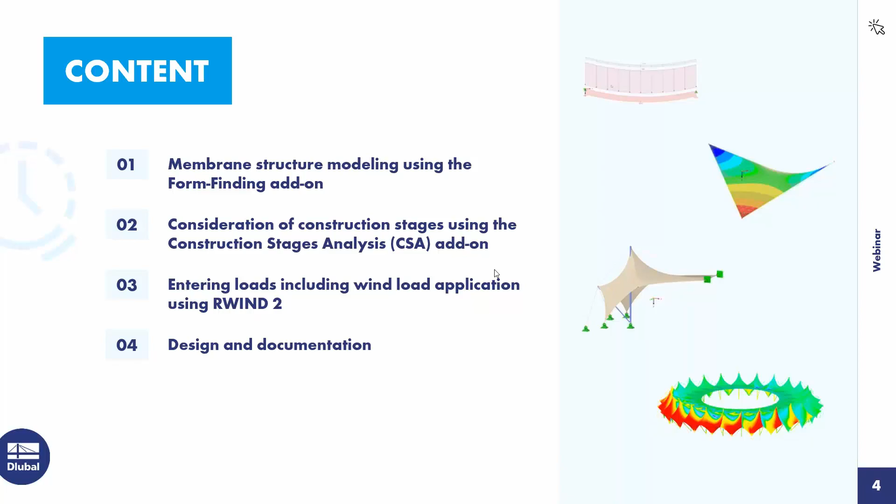Okay, thank you, Andreas. Then I take over and start with the technical part of our webinar. Today I want to show you how we can deal with membrane structures in our new generation, RFEM 6. For this we planned 4 main points we want to show you.

First, of course, how you can model form-found shapes and work with them in the program. Then how we can organize these shapes to each other with stages. Third, how we can create wind loads according to CFD analysis on the structure. And finally, how you can design and document such types of structures.

Of course, I can't do this completely for one project in one hour, but I want to give you an idea of how this is working. You see on the right side some pictures from top to bottom.

Since the new generation has a new input concept for these tools, I want to explain this with a simple example on a cable at first. Then we go to, let's say, a hypar sail surface structure, and afterwards we use all these functions I explained on a more complex structure, a stadium segment, and finally we take care of wind simulation on the complete stadium model, which you see on the bottom.

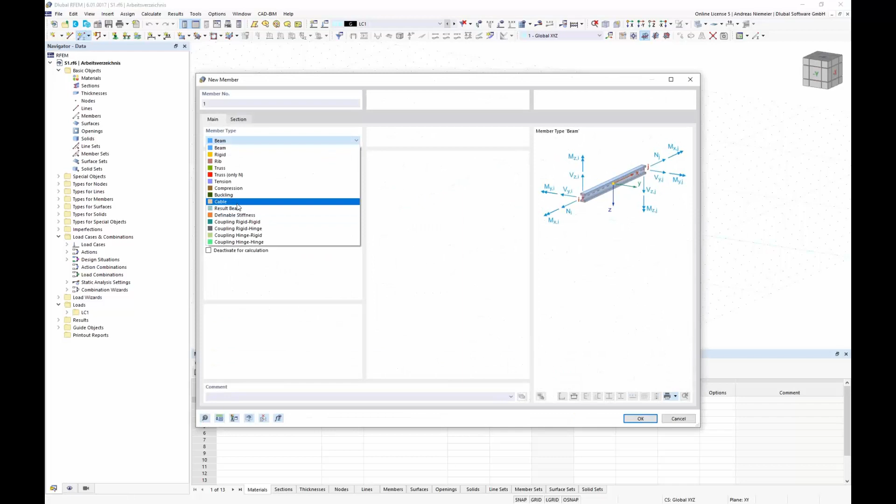As mentioned, we will explain all new features on a small, easy example. I selected here a cable example, therefore let's model it. I use a new member type, cable, with a cable cross section.

Let's select one from the library, for example this PE cable with a PE cable material with equivalent stiffness, and define here a cable with a length of 10 meters between 2 points. So that the cable will not fly through the air, we have to define some boundary conditions, therefore I define here 2 supports.

Now this is the input for the model. As you see, a simple cable, and on this structure we will explain all the features. Of course, what I always do when I explain form finding is calculate the deflection of this easy example.

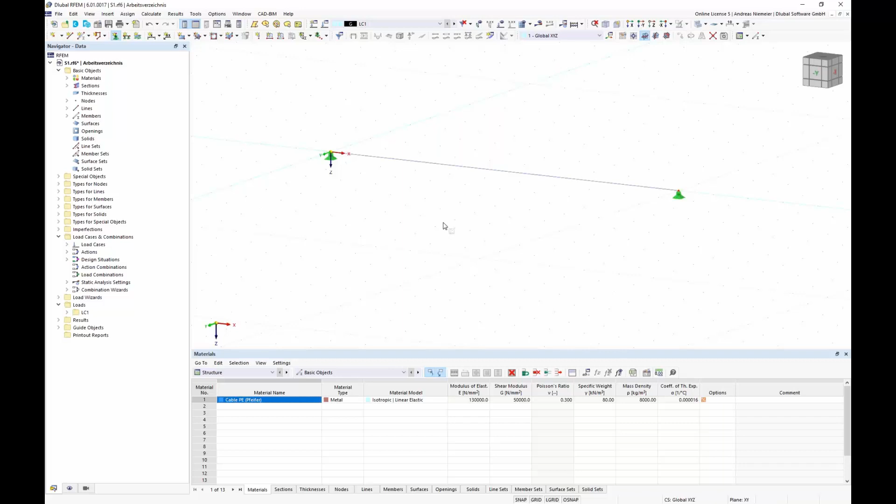Let's calculate the self-weight load case, which is always defined automatically in our program. If we run the analysis of this load case, we will get from the program, as expected, a deflection curve. Here you see 66 millimeters sag.

Of course we can deform the sag manually, or let's say scale it. We can animate it, and when I scale it to 1, you will see that the deflection curve will lie on the topology shape.

This is maybe the first point I want to mention. In our new generation, we have programmed an intelligence that draws the topology, the cable structure in this case, on the deformed shape, here with a sag of 66 millimeters.

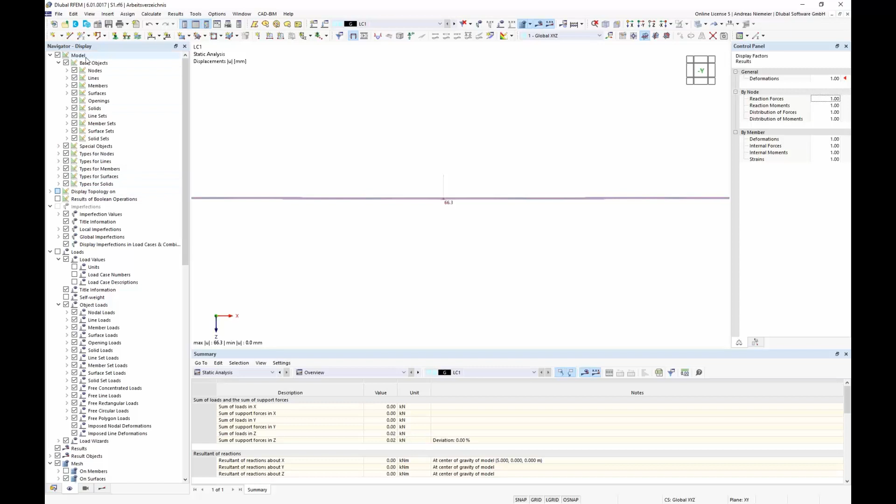You can change this in the display navigator below the chapter model, displaying topology on the original shape and deformed shape. You can also change it here with this button, between original and deformed shape. This is a small change that should help to understand the model a little better.

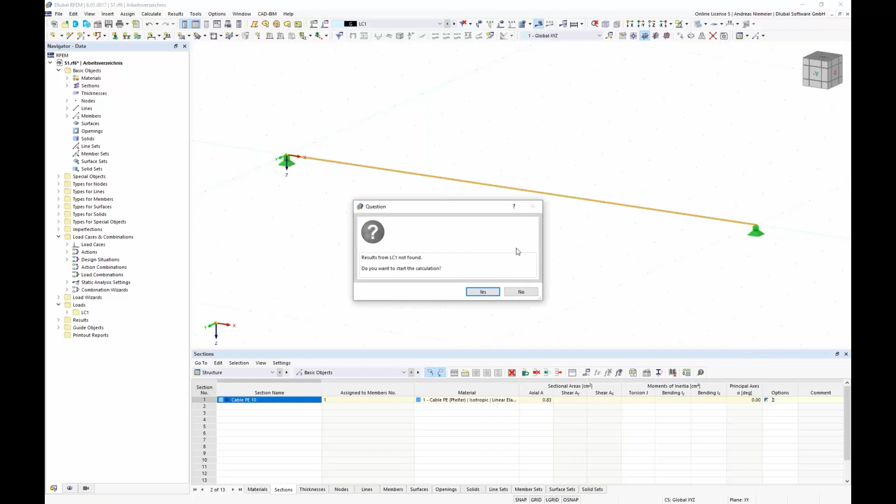Let's make a bigger force to show you the effects. I expect a bigger force here... yes, 1.25. But if you see the force here, you could say you want to simulate a cable with a longer length in the program, so that you can reduce the normal axis force here.

This is possible with our form finding application. For this, you have to define, besides the self-weight load case, a pre-stress load case. I call it P and define here an action category of pre-stress. This is now the step in our form finding tools.

This pre-stress load case is empty and should be filled with boundary conditions for form finding. We go to the member loads, to load type form finding, and define a geometric definition expecting, for a specific load, a sag or cable length of, let's say, 0.2 meters.

If we apply this load, it looks like a line load or similar, and it indicates that we get here a 0.2 meter sag.

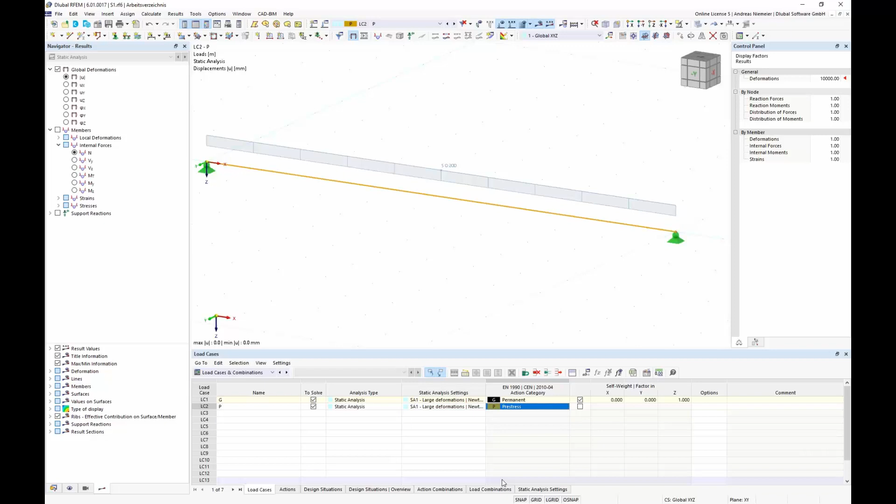In this case, if I take a look at the load case list, we can say: please find me the shape with 20 centimeters for the self-weight, for example. It could be any other load also. But if I say this for the load, I have to go to the load combinations and define it.

For this, I deactivate the wizard first and go to the load combination, saying please combine form finding with self-weight. This means for the program, since this combination 1 contains only this form finding pre-stress load case and one other load case, that this is a form finding job.

If we run this analysis, the program searches for a shape which fits the conditions. It searches a shape where it can fulfill almost this 20 centimeter condition with a corresponding force. Of course, we don't meet the target completely; we have 213 millimeters and not 200, but this is a matter of accuracy.

It's maybe the standard definition for a specific model size. If you want a more certain result, you can change the properties of the calculation. This leads me to the next feature, how this is organized in RFEM 6.

We change to the properties, and you saw we calculated CO1 — every load situation, load combinations and load cases, have here a static analysis setting. This means I can assign to every analysis or load situation a set of calculation parameters, and these calculation parameters also have a form finding sheet where I can define these settings.

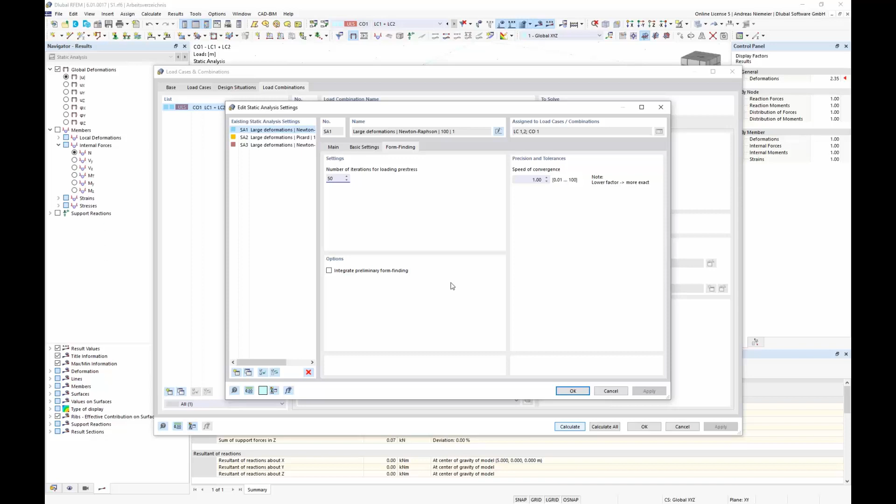You see there are fewer inputs; we simplified things a bit. I increase now the pre-stress loading to 50, and after confirming and rerunning, we hopefully get the 20 centimeters — and yes, we get it. The program found the shape at 20 centimeters with a corresponding force of 0.4 kilonewton.

So far, this was our first form finding job in RFEM 6. And maybe you saw now that we gave you, as users, a new, powerful capability in the program to work with shapes.

In difference to our old solution, we can now manage more shapes in one model, because now I have it in combination. Before it was only one. This means, if you imagine, this is shape 1, form finding 1 is G plus P.

And you say, I want to check in my model also another shape. Maybe the shape should be based on a point load in the middle. So let's define a load here, call it N, give this load case the type permanent, and define in the middle a concentrated load with the size of 10 kilonewton in the middle of the beam, placed exactly here.

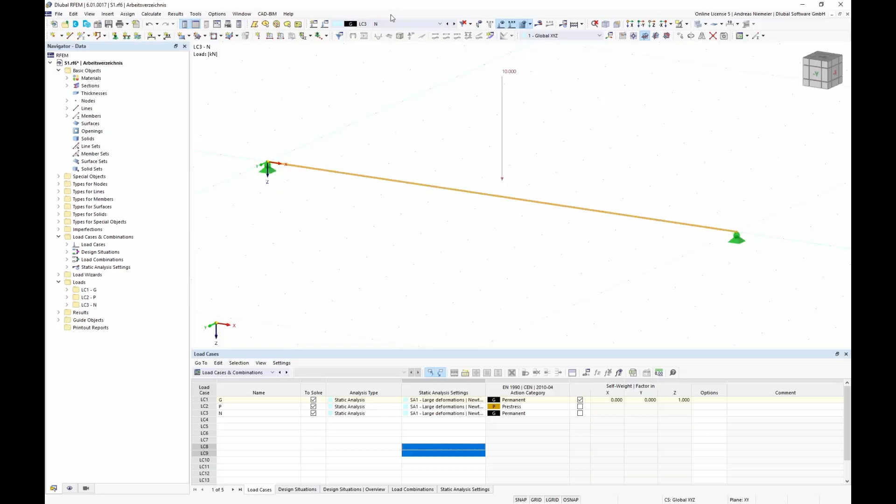Now let's create a second parallel shape besides this self-weight based shape. So I go again into this load case and combinations dialog, into load combinations, and create a shape, maybe FF2, based on...

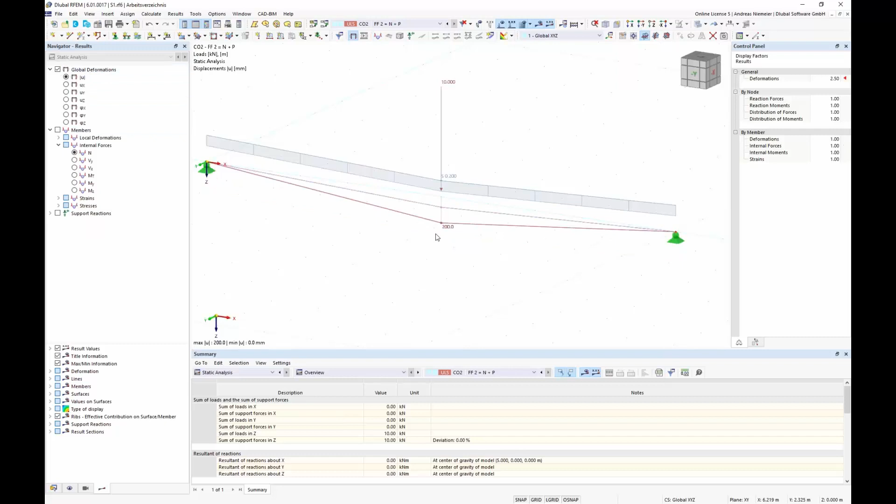N plus P. For this we only have to change the input, so P and N, in difference to the first one. If we calculate this, you will see you can do another shape in the same model. We have 200 millimeters in the middle, but if we take a closer look, according to this form finding load in the middle, this concentrated one, we get a triangle shape with a corresponding force.

And you can change between both shapes. So this is now possible and gives you much more options to check your models or to create something new. So this is one point I wanted to show you.

So the next point was, and I remember too many questions on this support, how I can deal with partial safety factors in the program. Do you have a solution for it? With the new generation, we want to give you a solution.

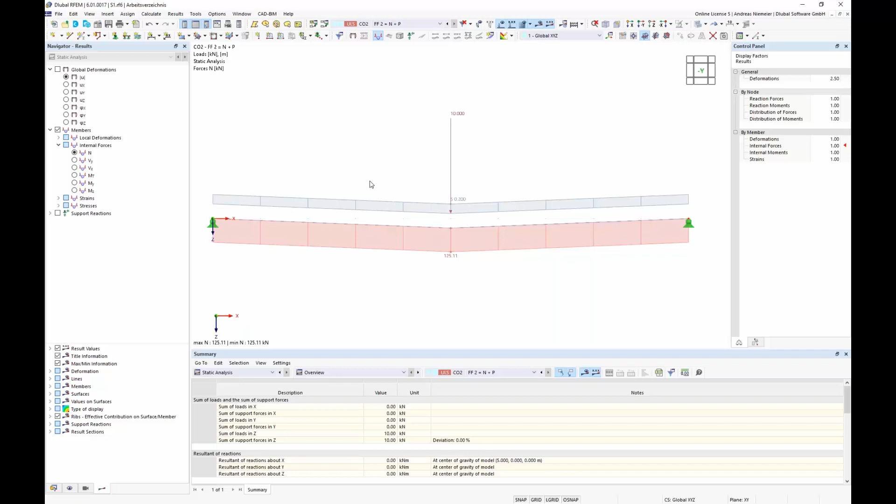So I can say, of course, we can create a third shape. For example, I copy the first one and say let's scale it up, and define here 1.35 as factor, and so that we have a clear name, 1.35g plus p.

If we calculate this, the program knows I have to do a form finding with the form finding condition of 20 centimeters. It was not scaled up, but with a bigger surface weight load scaled with 1.35, therefore we get a slightly bigger force on the cable, not 0.4 but 0.56. You see the program is ready for this.

Of course, we can also scale the pre-stress. This means if I scale the pre-stress by 1.35, and for the name here, 1.35 form 4, for example. This was form 3, only so that we have a clear description, and calculate.

Then we can also scale the form finding inputs. You see not 200 and 270, what is the factor 1.35 in between, with the corresponding force again. So it's an easy game to work with different shapes in one program now.

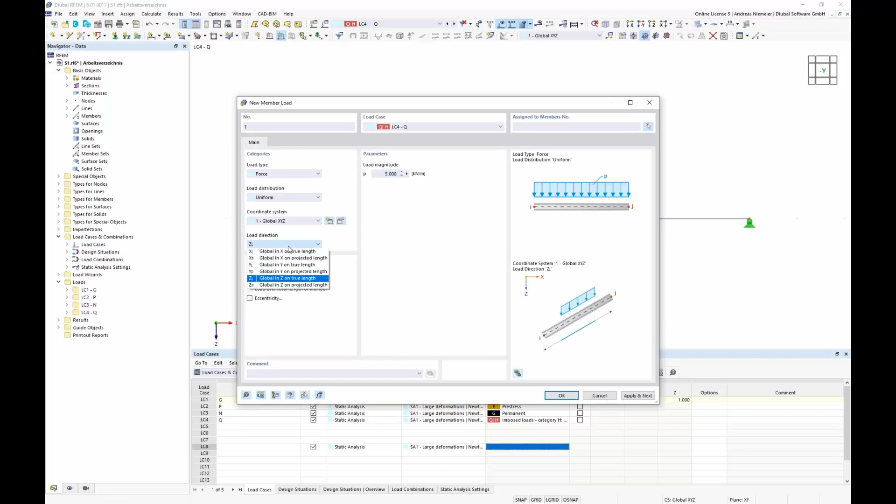So first define some additional load. I define here, for example, a variable load with any category, let's take this red one. Now apply, for example, 5 kilonewton per meter on the structure with a projected load. So far we have a load on structure. If I run this load, what happens?

Without any further specification, the program applies this load on the 10 meter long cable, not in any shape. But if you want to apply it on shape 1, you have to assign it. This means we go again into this dialog, load combinations, and give a name, Q on FF1. You can do this if you define an initial condition or initial state. So here you specify the shape, for example shape 1. This means we take over the geometry of mesh and the inner forces, and to get a full set of calculation we apply also the outer loads.

Form finding loads and the expected additional load. According to the situations we've defined here, with an initial state as starting shape, the program knows that this is no form finding job, only a pure static analysis job. Let's calculate this and take a look how this is looking.

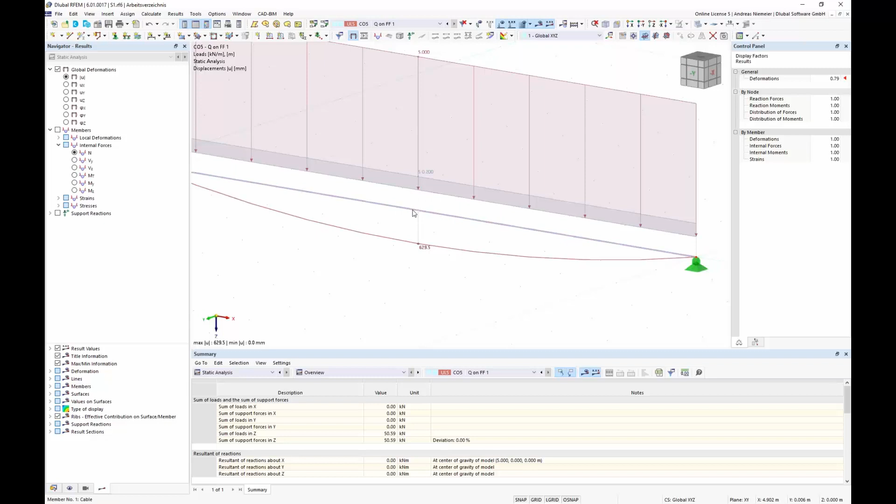You see, when we take a look at deflection, we have now a deflection of 629 millimeters, starting from the original shape. So this is what we inputted, this is the shape of initial state, this is our form finding shape, and this deformed shape is the loaded form finding shape.

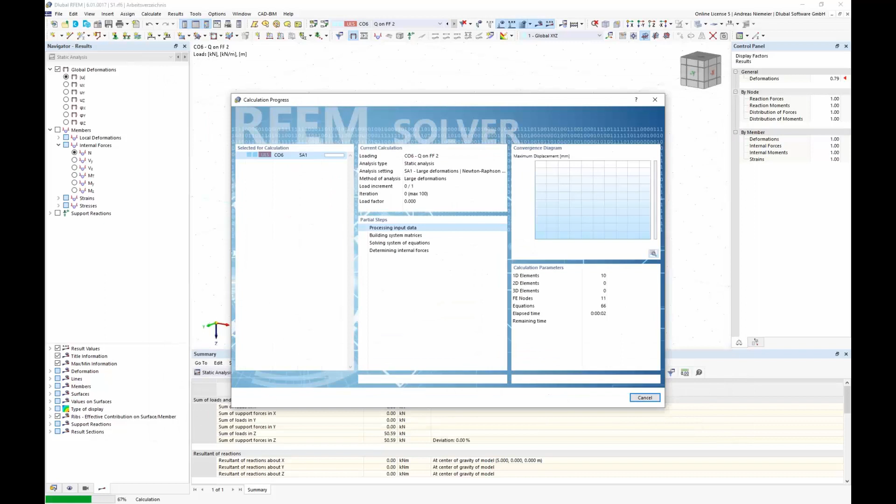The program gives you the option to manage all this, not only for one shape. If you wish, you can also apply the same load on shape 2, meaning we only change here to shape 2 and exchange the load to N. With calculation we get the same task, only on the original form finding shape 2 plus load, with a deformed shape of 493 millimeters and a normal axis force of 177.

So this is our new philosophy of working with form finding tasks and organizing them in the program. This brings me to the next point: how we recommend the standard work, or standard use, of these tools. If you're starting with a new project, you don't want to test it like I just showed you.

On a real project I recommend, and for this we create a new situation. So I delete all this stuff, go back to load cases, and remove this. Now we have these 3 load cases, a standard situation.

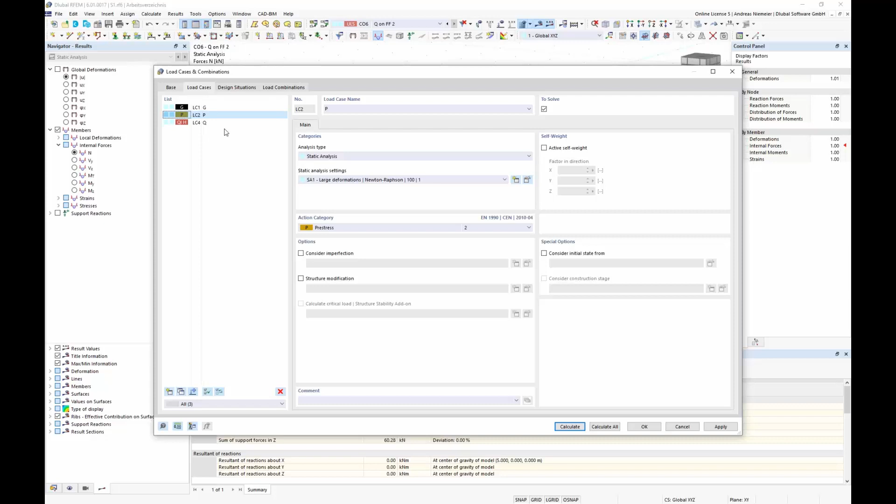In a standard situation I recommend you use the combination wizard and say: please combine all these load combinations automatically. This means the program takes over all this, but it has to know what is my shape. To define the shape for the program, we create it here as an individual load case.

So we select both, for example P and G, add it, and say this load case is shape 1. Now we give this shape 1 the pre-stress load case. Now you see we have 2 pre-stresses in it, but we only need to use 1. So I set my action set, pre-stress, that this is shape, not needed, we only want a combination with P.

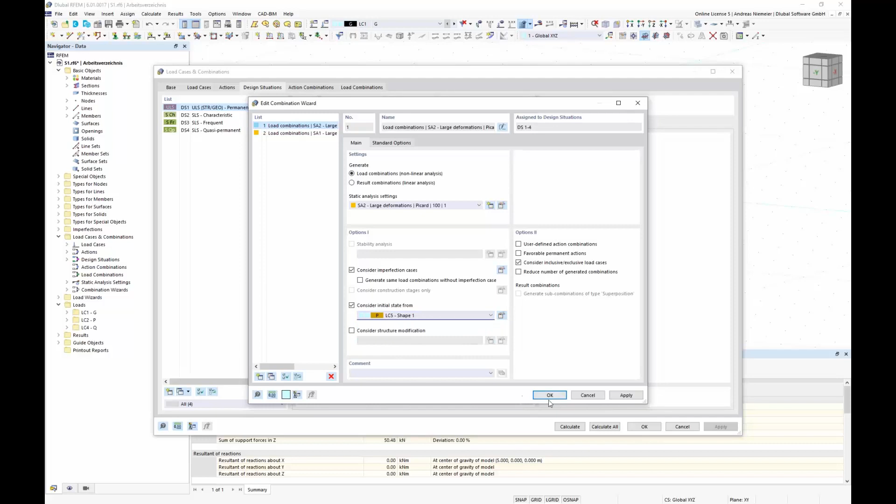We go to the design situations and tell our combination wizard: if you combine something, please always consider shape 1 or any other shape. Of course we have to use Picard for this.

So now if we go to load combinations, you will see the program combines for us all combinations according to the rules of the standard, so ULS and SLS with factors, without factors, and you see in all combinations automatically shape 1 is assigned, and even here all load cases, the external loads, are also placed in the combinations. With calculate all, you get all forces expected in this case.

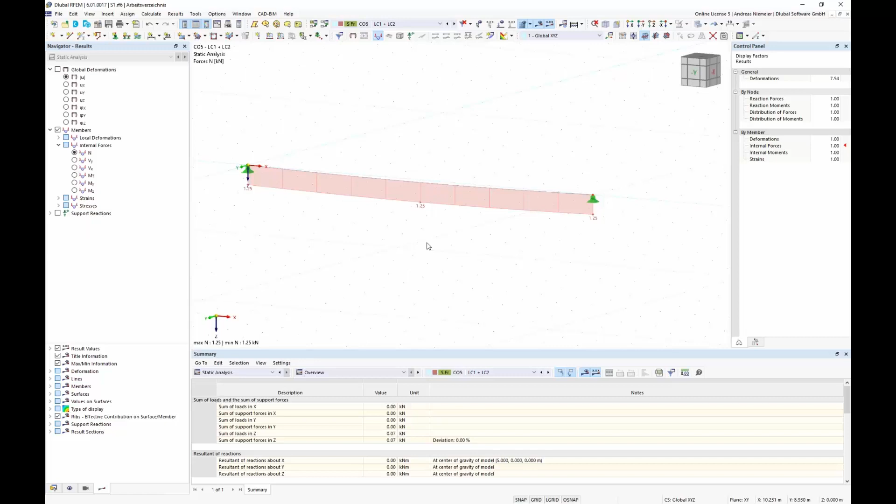First it calculates the shapes and then it sets it up. So this is maybe the first introduction example showing you how to work with all these tools in RFEM 6. Of course this is a special example because the shape for cables always depends on the form finding condition: how big is the sag, for example, plus any load for which we have to detect the shape, the self-weight, for example.

But there exist different examples. Maybe the next is here, a surface structure, a membrane structure. I prepared this example only to show you it could also work like this.

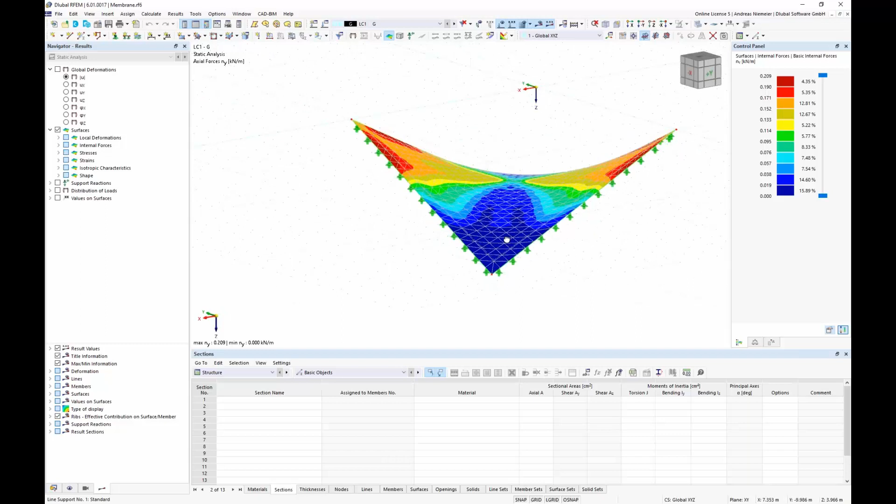In this case we have maybe such a sail with typical load cases: self-weight, pre-stress, and snow load. So for self-weight, that's the weight coming from the material itself. For pre-stress, we defined here the inner pre-stress, the membrane tension, by a surface load.

Like we just did for members, with load type form finding, and defined here in X and in Y the 3 kilonewton per meter. You see if you run this shape form finding job, you get the shape of the membrane, and you get internal forces in the membrane that almost meet the defined 3 kilonewtons.

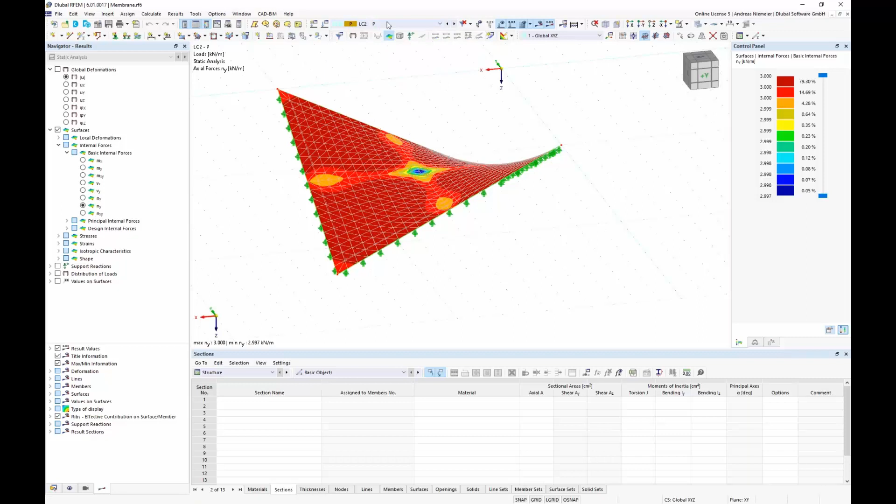If you want to combine all these 3 load cases in combinations, as a standard recommendation you go into the load case and combination menu, define the combination wizard setting, which is on by default, and set the wizard to please assign always the initial state, the shape from load case 2. Not more, in this case it's enough.

If we go to load combinations, you see the program assigns us, even for this surface structure, this shape from load case 2. And if we run the analysis, the program uses this shape and detects the forces. As you see, if we go to the characteristic solution, we have here shape plus self-weight.

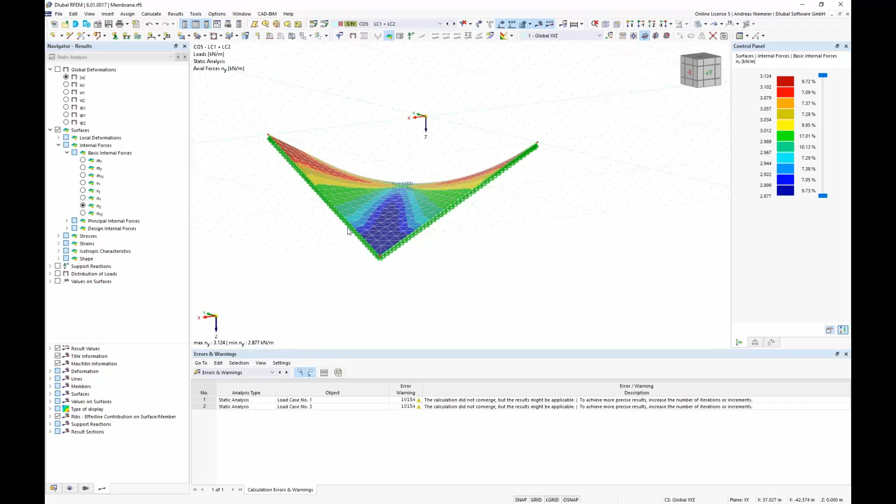It's not almost 3 because self-weight is applied afterwards. If we apply maybe even the snow load, you see the forces have bigger changes because the load has effect on the given shape. So even this type of model is possible in the new environment.

And now we learned that we can use pre-stress load cases with form finding loads to find shapes, to organize shapes, to assign shapes to load situations. I want to go the next step and say it's even possible to use shapes based on other shapes. And if you have such a task, then you can also use RFEM 6 for it.

I prepared for this type of analysis a special picture to explain it to you what we want to do. This means you see now here two pictures on top, a segment, a ring segment, a 15-degree segment of this stadium below. And if you see this, this consists of a primary and a secondary structure.

The primary structure is maybe this column with this bracing in back, with these stay cables and these tension cables with this inner ring. And this is the primary structure. And if this primary structure is set up, the work is coming and hanging in the membrane. And this is the secondary structure.

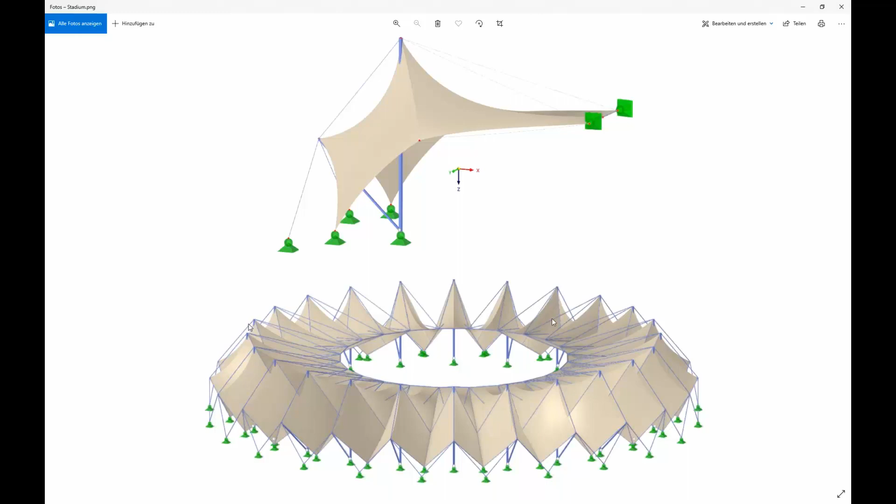So let's go back to RFEM. Open a new model. I call it S2, and define all tasks what are needed for modeling this part of the stadium.

I go to add-ons and say, please use form finding. And because we have these different stages, primary and secondary, I activate construction stages and go in. Of course it exists, so overwrite it.

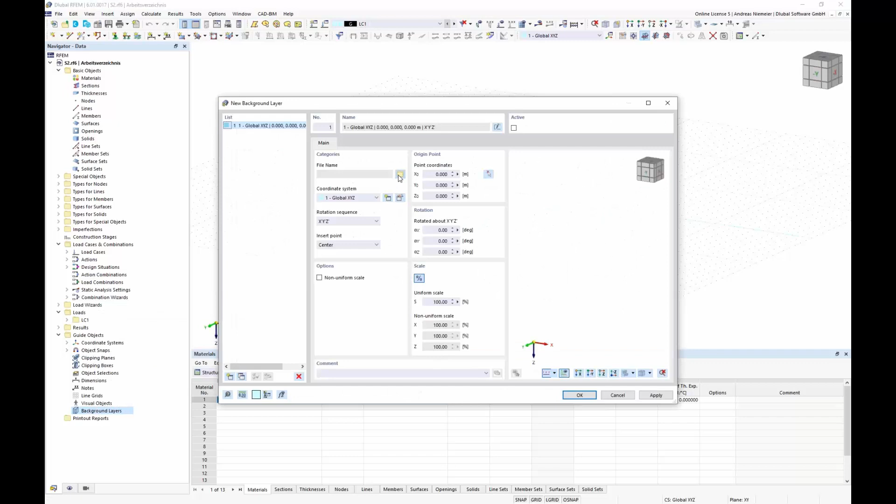Now let's start. Of course it's not easy to model a whole stadium or a fragment from it, so I prepared a DXF background layer. I go to background layers and import here a layer from a DXF file called base.

And you see this is my DXF data. It's on the wrong plane, so I rotate it 90 degrees and then by 180, and then everything fits and we can overtake it. Please take care that it's activated, so active.

And now we have this, let's say, basic geometry in our program. You see on the bottom there's a tribune only for imagination, and then you see here this main element is for the primary structure, and then the membrane for the secondary structure. At first we model primary, take a look, and then we add the secondary part.

So let's start modeling these members. I go to the member dialog, member type beam. Let's select a section.

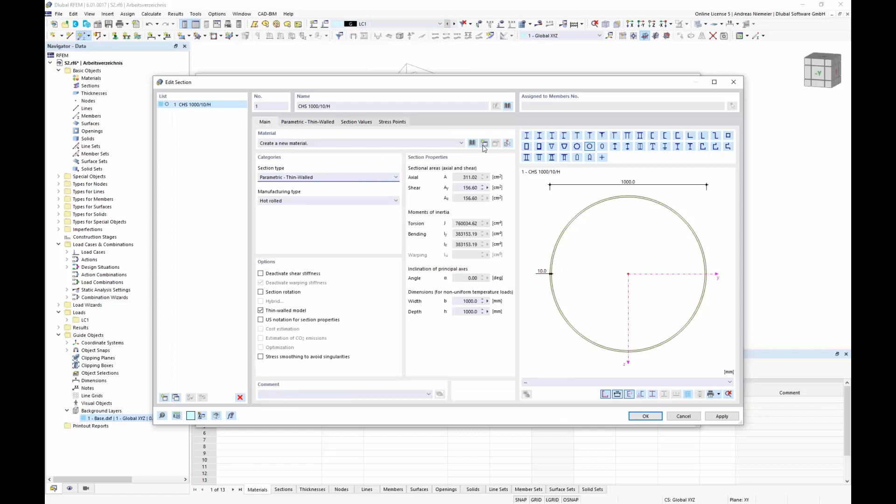In my case here, because I don't move the section, my proposal is for the final state, but here I would select a diameter of, for example, 1000 millimeters with a thickness of 10 and a material of maybe S355. So let's go to steel according to Eurocode. Select here standard according to Eurocode, this one, and select the steel here and go.

Now we can place this column here in this structure, from the bottom to the top. Let's add here a bracing member what is connected hinged on the bottom, so if I activate the hinges, and here you have a different cross section, for example 600 millimeter diameter with a thickness of 10. Of course this could be optimized according to the section proof afterwards.

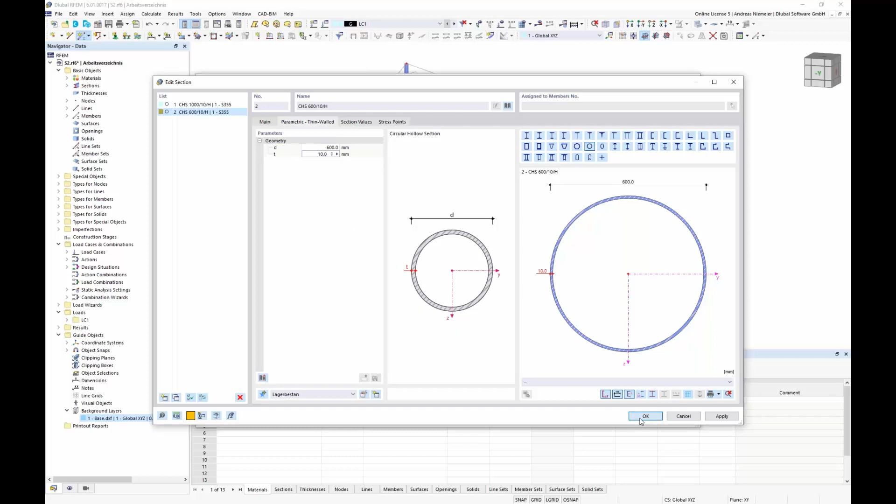So hinges should be hinged on the bottom, so define here hinges about Y and Z, and now we can place here the member between these 2 points.

This structure will not be stable, so we have to use now stay cables on it. The stay cables are acting now on the outer fraction of this segment. So at the moment it's only a slice, but it will be a 15-degree segment. So we have to create it.

For this we need a center point of our structure. Because I know here the diameter of the structure is 288 meters, I copy this node 144 meters in the middle. And this is now my center for all rotations.

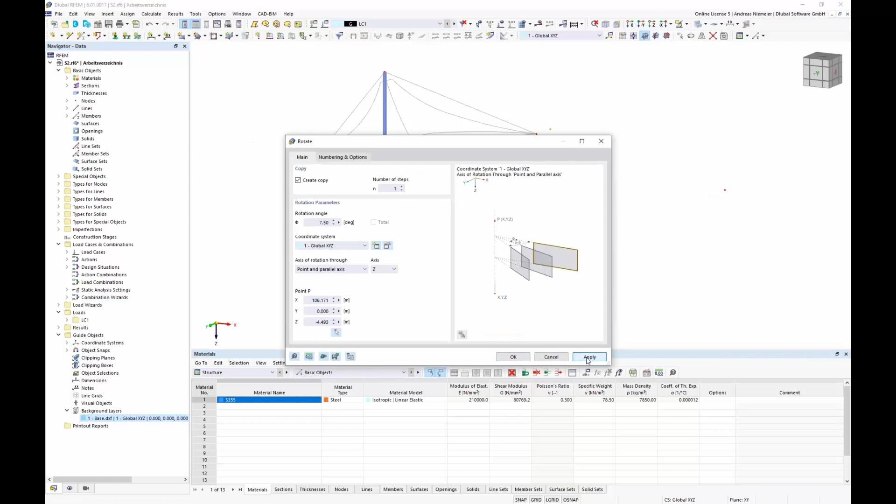And we can create from these nodes now the outer points for this segment. So I select these 3 nodes, rotate it by 7.5 degrees about the global z-axis around this point and apply, and now minus 15 degrees and OK.

So now we get these outer nodes. When we take a top view, you see this is maybe the geometry of this 15-degree segment. And now we can place the cables, what means the uninteresting nodes we delete before.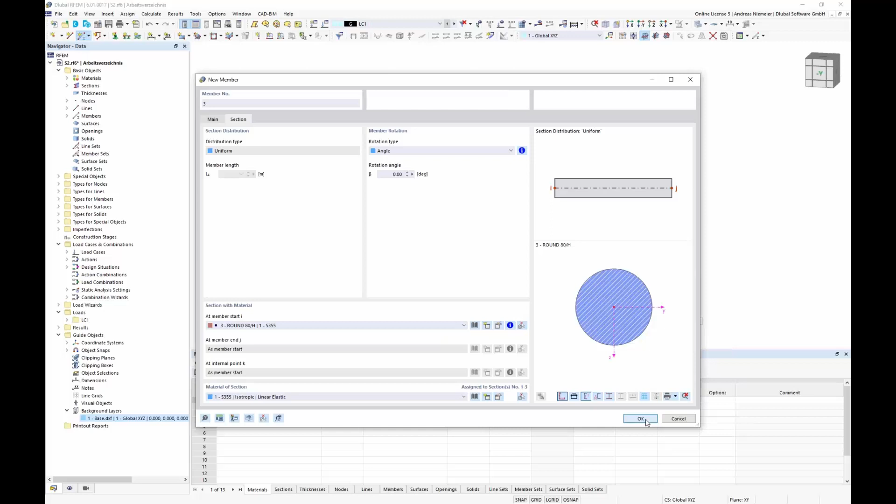Go to the new member function, use a cable, and now select equivalent sections with an equivalent stiffness. For example, here a solid section with a diameter of 80. So now we can place it.

Here and here, and now to the top. And now we need maybe some suspension cables to the front. Here we have a different diameter, so it's a cable at least.

We use here a solid section again with a 30 millimeter diameter, and then we can connect maybe the peak point or top point with the front points, and maybe make some stabilizing cables back to the back bracing. So this is almost the primary structure for the stadium segment.

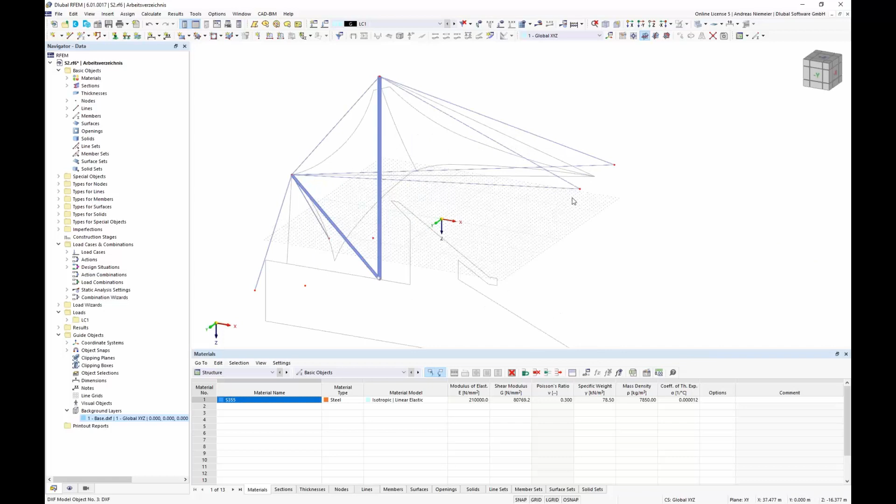The only thing missing is the tension ring around the structure. Let's add it. We take here a cable with a section, and maybe here need some more mass, for example 120 as equivalent section, and connect both points and directly define a middle point, so divide the member for a later connection of the ridge cable. So this is now everything I have to define for members for the primary state.

So I deactivate the DXF, so you see what is left, and now we have to define the, let's say, boundary conditions. And boundary conditions are, let's say the easiest ones, are supports.

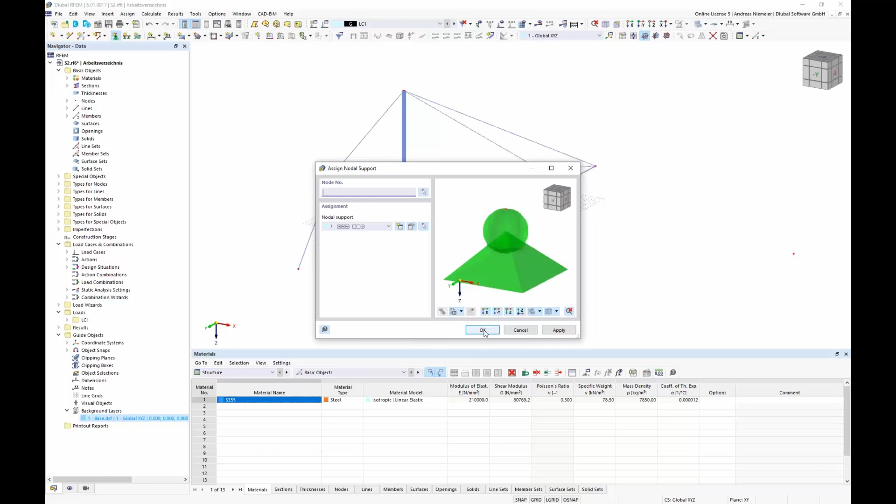So we define here a fixation, fixation, fixation. And of course this front point is not weak - we need a rotational symmetric boundary condition so that this is overtaking loads. So I have to simulate this tension ring around.

For this I use also nodal supports, but I rotate it in running direction of the cable, which means I fixate the degree of freedom in UY direction with a specific direction around 7.5 degrees.

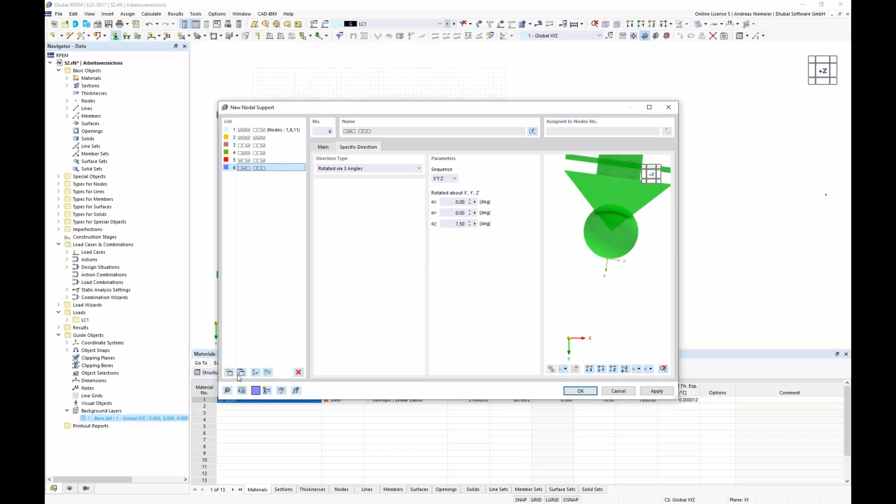And now let's copy it so we have it also for the other direction with -7.5. And now we can start applying this support here, and the same for the last direction, and we get a structure that can simulate this tension ring.

So the structure itself is now ready. The only thing missing is the form finding conditions to find the right shape for this structure.

And if we want to do something with form finding, we learned already we need a load case pre-stress. So this is G, permanent load case, and here we need a load case P, pre-stress, for defining these form finding conditions. So let's do it like this.

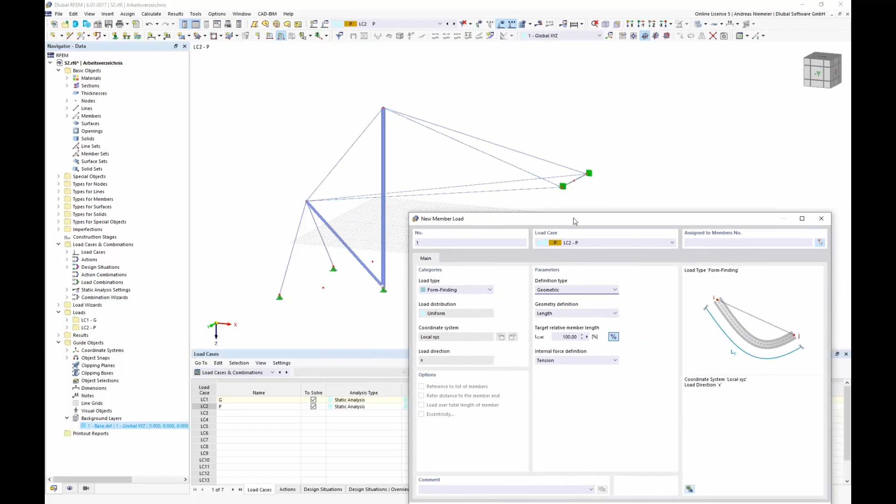This entry is done, and define here with member loads, type form finding, geometric definition. So you see we have different options - geometric definition, force condition - but in our case, in this type, I would say generally he should find a shape with the original length of the cable. So I define geometric length by 100% and apply this on all cables.

In the construction stages we can define now a stage, primary, or not primary, let's say shape 1 - it's easier to understand - and we say shape 1 consists of members and nodal supports, and the members, I draw a window about everything, okay, and the nodal supports the same.

Everything good so far. Okay, so the amount of elements is clarified in this stage, and the only thing missing is that the program knows it should do a form finding for this stage shape 1, which means it should consider these load cases as permanent.

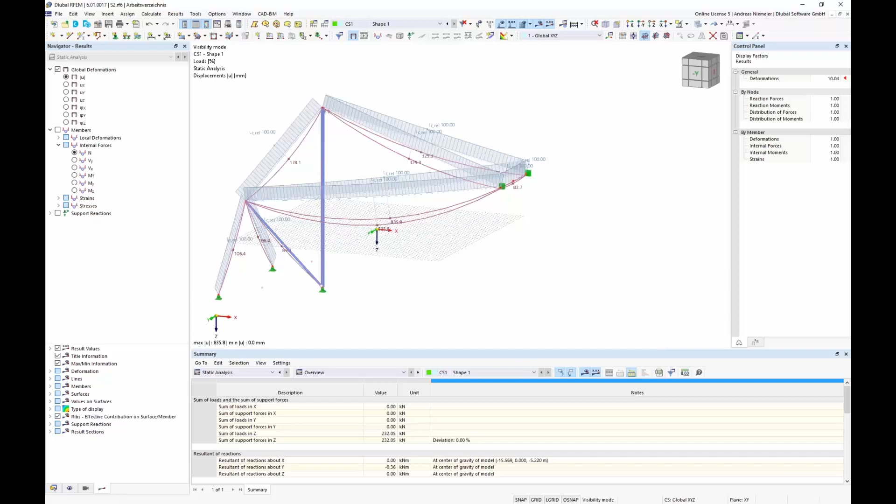And if we calculate this stage with this load selection, it's clear because nothing else is here, he can do a form finding for this type of structure. We get small sags, we get forces, so everything is clear so far.

The next point is to hang in the membrane, what I mentioned before. So if we take a look at the background layer and set it here, you see now we have to bring in the membrane on the already deflected and loaded shape 1.

To do this, let's say delete mesh and start modeling the rest. That means we define, for example, the boundaries of the membrane.

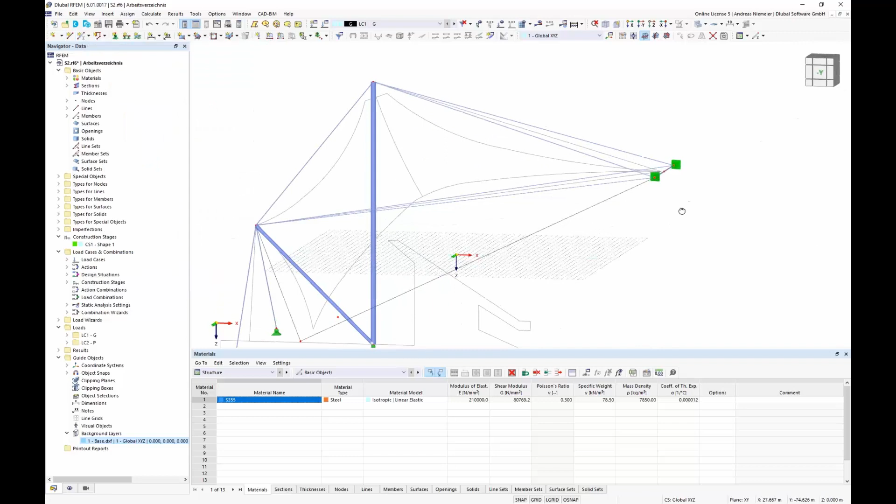It's running to this point, and even from here to the top. The only problem is I have to specify that the cable is not running in the other direction, so I rotate my grid point plane and use some arc lines to cover this. I simplify this for the presentation and pick the line, same here. It's not important if this line matches the DXF shape exactly, because the form finding application will find the right place for the structure. So it's not a target, just a tendency of where it should go.

Now we need a splice cable here, so we define a spline. If we want to define it on the perpendicular point, we can do like this. Now we can deactivate this shape.

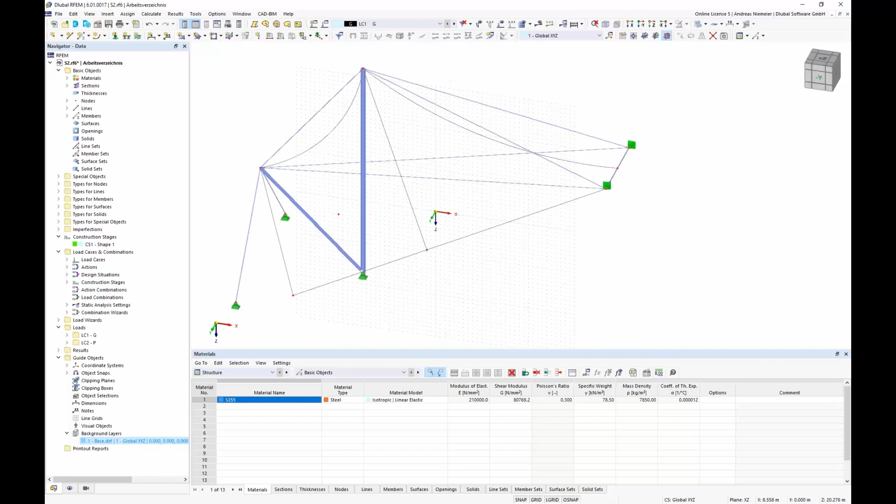You see we specified the boundaries for the membrane and can now support cables on these boundaries. I select all these lines, go into the library, edit lines, and say these lines should hold members with the type cable, and define the last section, for example one with 20 millimeters.

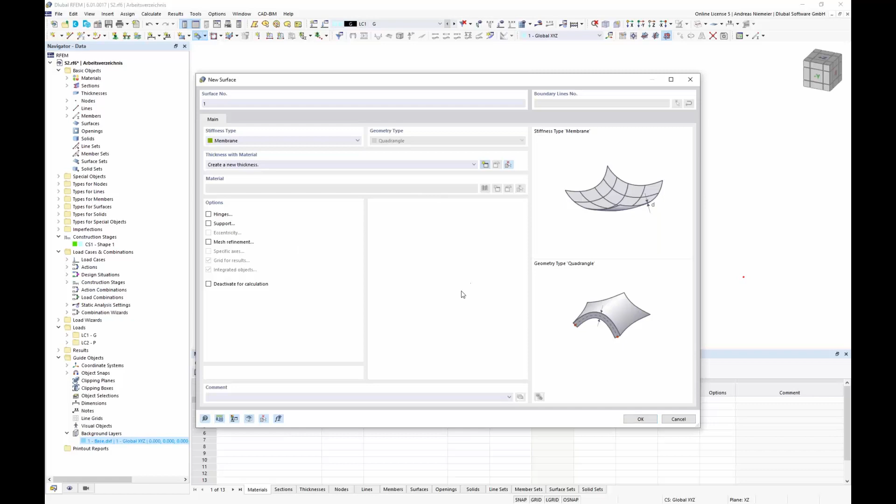So far it's good, and now we can bring in some membranes within these cable boundaries. Because this produces some non-planar surfaces, I select as initial shape a quadrangular surface with the type membrane and go to the library. This is maybe new: in the library we now defined fabric material, standard materials with an average set of stiffness values. For example we use the glass PTFE type 3 option. The program knows, according to the defined stiffness, even the reference thickness of 1 millimeter, and now we can place these surfaces between these cable boundaries.

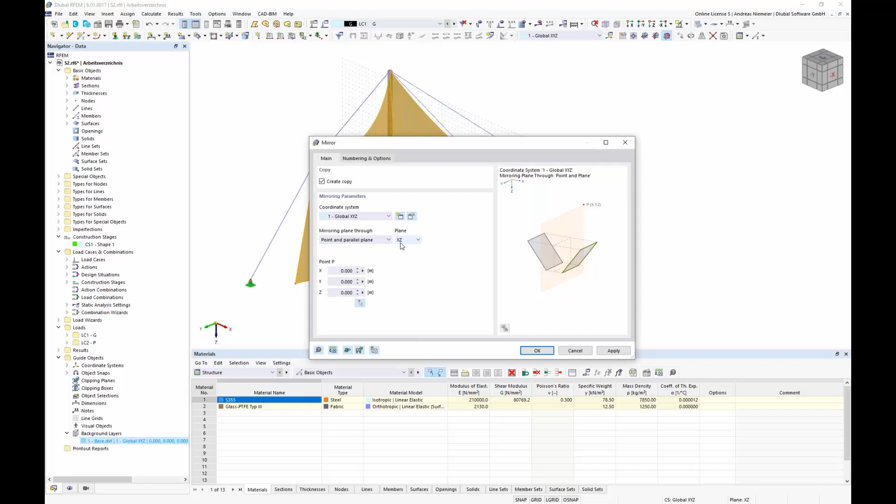If we take a look at the transparent view, you see the definition is now made, and we only have to mirror this on the other side. So we use the mirror function, create a copy about the XZ plane in the middle, and go.

So all this is done, and now to finalize we have to take care again about boundaries. One type of boundary is clear: we have to fixate these lower corners here, and we still have to check that the rotationally symmetric support is working for this 15-degree segment. This means we have to support these boundary lines.

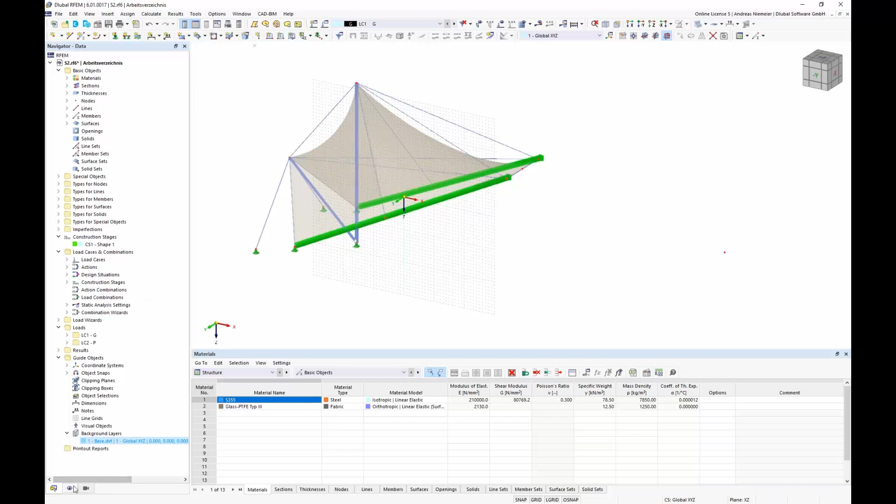So we use line support on local axis in local y direction and pick these lines here. So far this is done - this is a fat green line. I don't like seeing it all the time, so I deactivate it with type for lines in the display navigator. And now the last point is to specify even form finding topics.

We want to pre-stress the membrane with a tension load. So let's go to surface load, type form finding, and we can define the method of application, standard or projection, force or stress, and we say for example we have 2 kilonewton in x and in y direction, and draw it above the model.

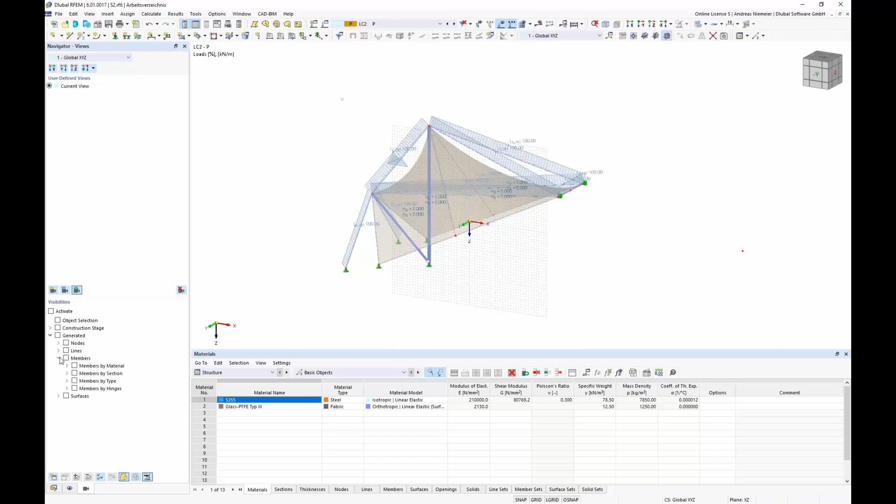This is done, and now only the last final boundary cables are missing, and now I see so many loads and I lost my overview. If you have the same situation, please go to visibilities, generated members by section, and activate the last one, and you see these members are left, and we can go to member load.

Form finding, and we can select the definition. Geometric you already saw, but we also have force options, and here you get some more options for shapes. In RFEM 6 you now have the option to place an average force, maximum force, minimum force on member, horizontal tension component, tension at start, at end, minimum tension at start and end, force density. So there are more options than in the old program.

We use now average force with, for example, 50 kilonewtons, and draw this over the structure, and you see the loads are set.

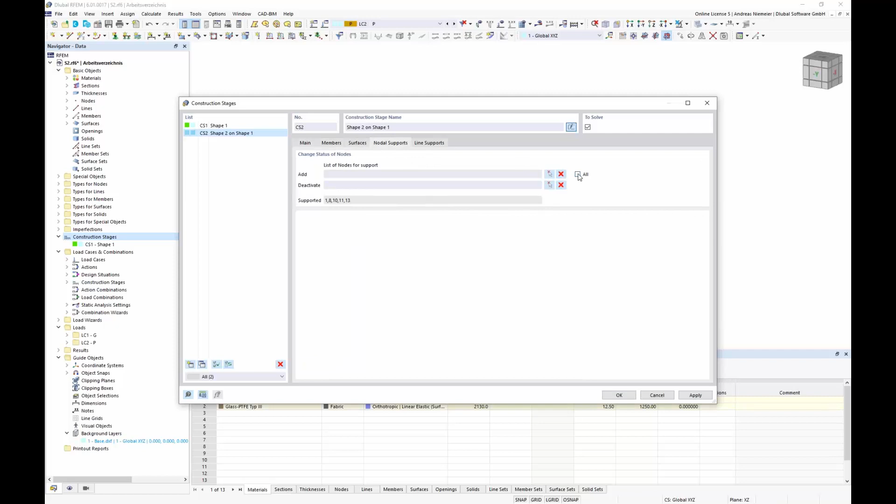So now loads are defined, boundaries are defined. The only thing missing now is that the program doesn't know what is my secondary state. So let's specify it in the stages and say please create a new stage, and we call it shape 2 on shape 1. And for this we say, okay, please consider also surfaces, please consider also line supports, and because we know no more elements will come, we say all, and all. So elements are clear.

So here we know which elements should be considered, and in the loads the program knows it automatically because stage 1 consists of self-weight and pre-stress, so it's a form finding topic because it's permanent. The same is acting for the second because it's permanent. So if we calculate now stage 2, the program has to detect first stage 1 because it's a basis, and now if he has stage 1, he calculates stage 2. So we have a sequence of shapes.

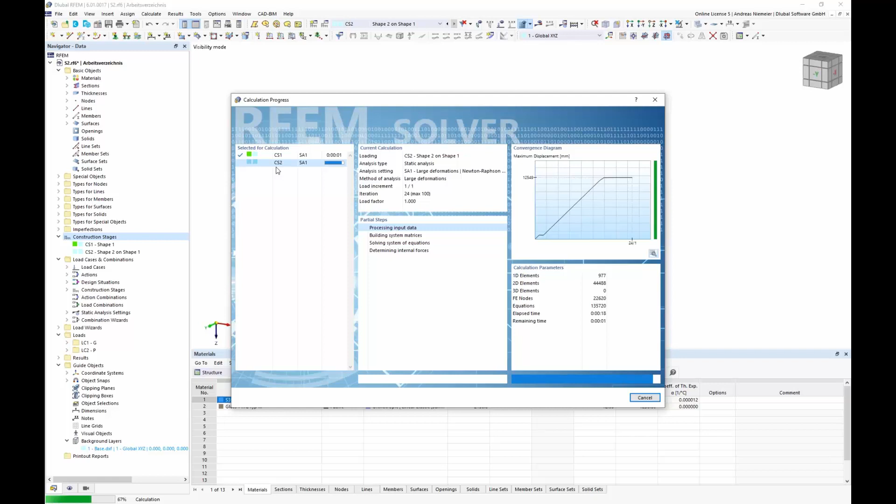This is quite a cool function, I would say, and gives us a big potential to calculate a lot of structures. You see now in our structure, when the update is ready, the shape of the membrane is on the already defined shape 1 with a new set of forces. You see here the forces in membrane, forces in cables, and it's clear you can change back even to stage 1, which holds only the member structures, and you get only forces on these elements and not more. So there is a pure organization of which element should be considered and which load should be considered, and RFEM 6 has it open for your definition.

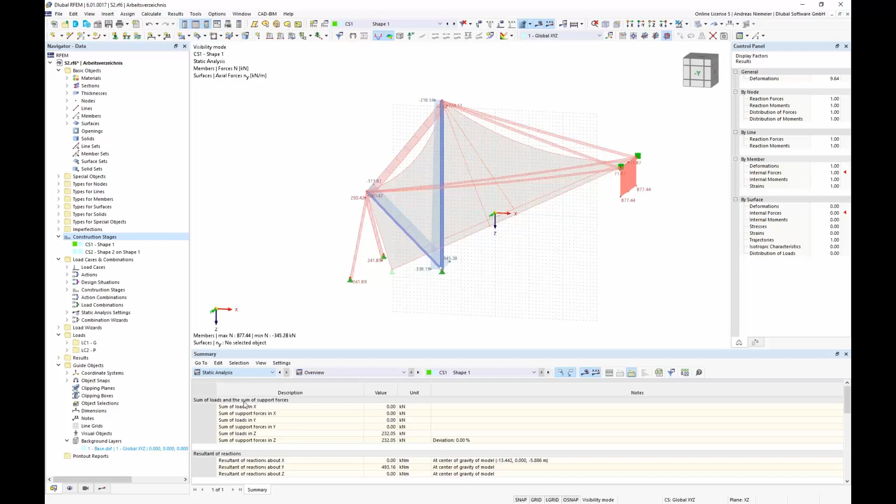And now if we have a sequence of shapes, the question will come up: where do I apply my additional loads? Is there not a weird situation or chaos? No, there isn't. So let's create a live load, and define here in the load list, for example, a Q load, where we say maybe here this red one, and we apply it on the surfaces. So a surface load force in projected area, maybe 0.2 kilonewtons. And we draw it over the structure, and you see it applies the load above.

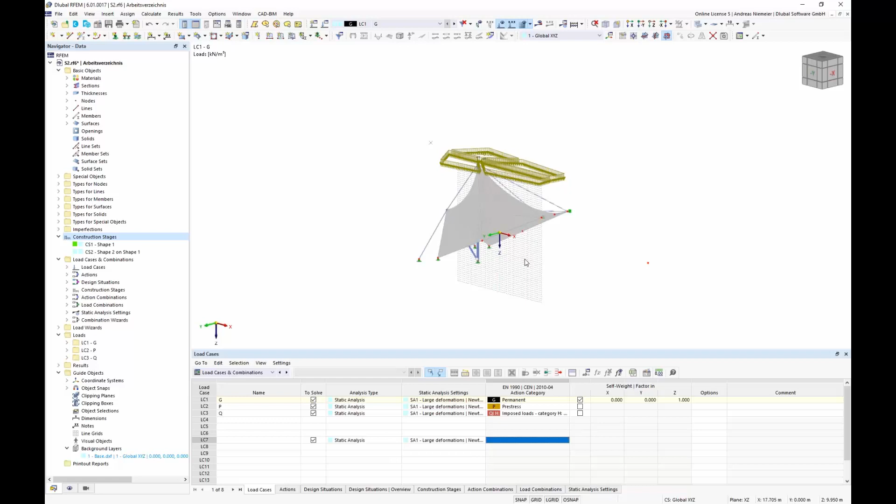The only question is now, at which stage should this load be used? And clearly, we have to go back in the load combination menu to these stages and say, oh no, we have to do something first. We have to give the program information on what is now the basis for your further calculation. And for this, we have to create a last final stage, and we call it structural calculation, calculation on shape 2. And for this, we can now start assigning loads. This means shape 1 has a start condition, shape 2 is based on shape 1, and shape 3 or stage 3 is based on shape 2.

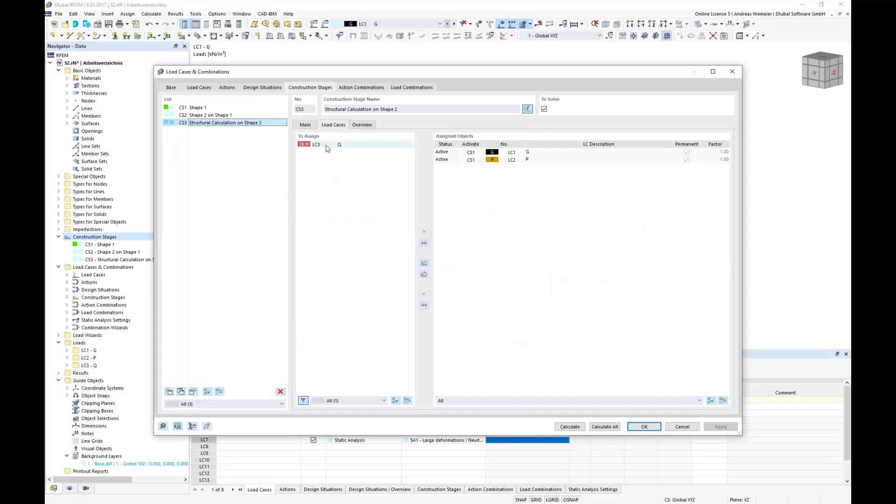And here we can say, please consider load case 3, variable non-permanent, in your stage. Now let's say everything is done for calculation, and let's pick load combination. And what happens is the program prepares us load combinations for ultimate limit state and for serviceability. But if you take a closer look, oh, initial conditions, initial states are not defined. So this is not so good.

But it's the same as for load cases. The program has to know for which stage. So let's go back and say, of course we want to have combinations for all stages. And the wizard has to say, yes, I do it for stages only with the Newton-Raphson solver. And if we go back to load combinations, you see the list is a little bit longer, but now has a stage allocation: stage 1, stage 2, stage 3.

Here we have 2 combinations, the same for the characteristic ones. And as you see, we have now defined stage 2 as basis and working on the element set of stage 3. So even this setting is pre-filled with all load cases. Now we can start calculating all.

Before that, I would say let's deactivate these load cases so we don't have to wait for all, and calculate it a little simplified. No, actually we can calculate all. So now the program is calculating all stages at the same time - to say it correctly, the program always calculates the load combinations for the stages that are already calculated. So it can't calculate the final combination which is based on a state that is not prepared so far.

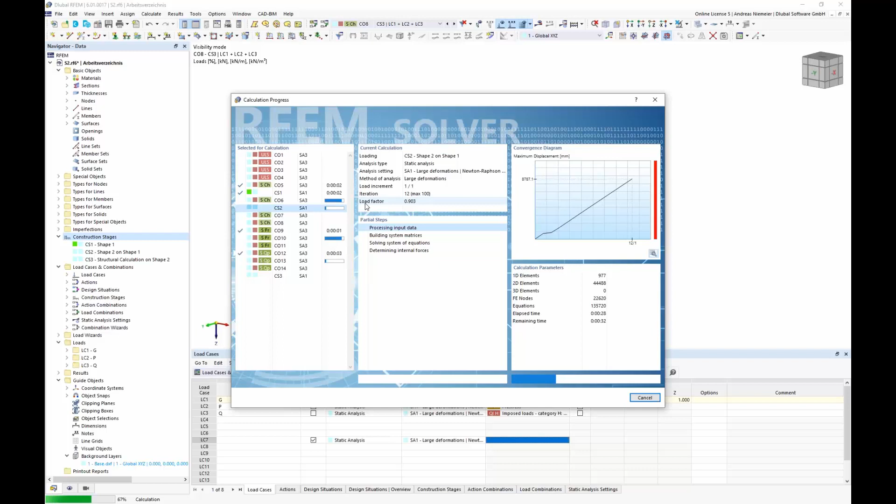So now we have to wait to get the analysis of these 14 load situations based on different statical systems. As you see, there are always 4 processes running on my computer at the same time. This is connected to a solver manager, because the program has intelligence which searches for how many processors are available and shares all this calculation task to these processors to get results back, using the complete available hardware that is possible. Of course, it cannot overjump stages in this case.

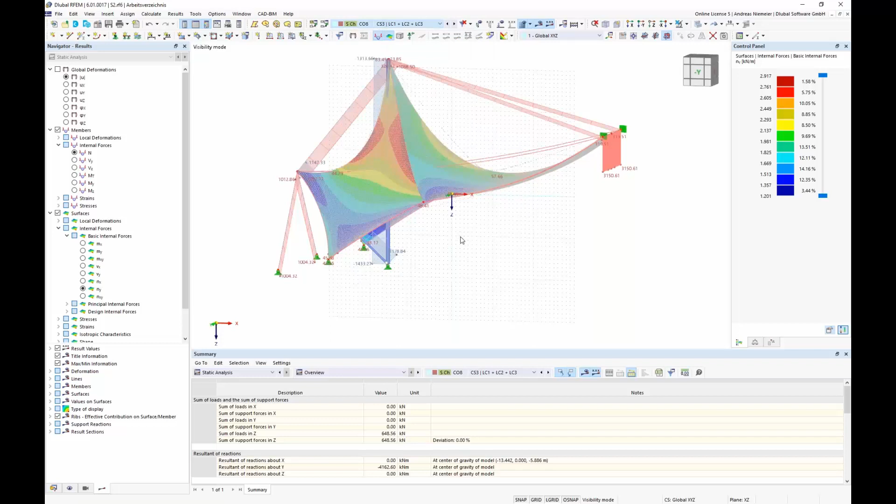So now results are ready. You see maybe nothing according to so many loads, but what is clear, let's open, for example, combination 3, what is here self-weight and pre-stress in these different shapes. So this is maybe a little bit scaled, but now you can select the different stages with the different situations.

This brings us to the state of how I can check if now membrane and members are so far okay. For this you can activate in the calculation add-ons the option stress strain analysis, and with activation of it you get in your table the option stress strain, where you can say what should be calculated.

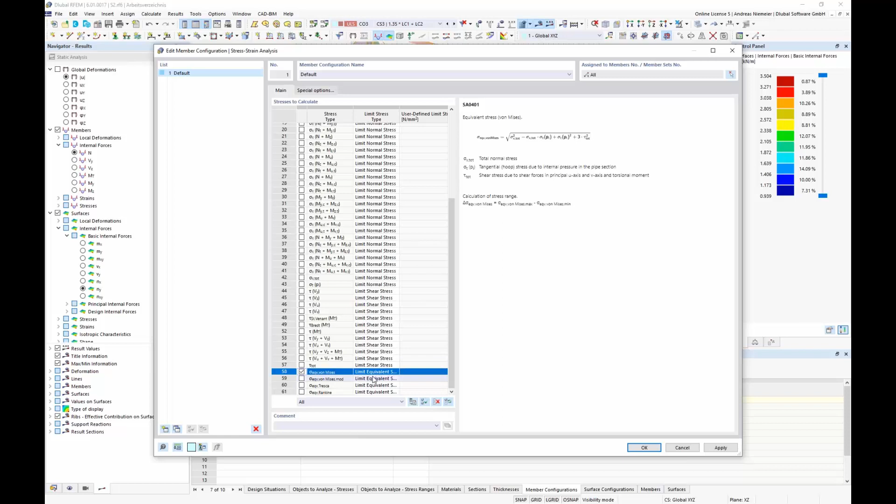For example, for members we say please check for us, you can select between all these stress components. It's endless and I think also boring. So from my point of view, sigma equivalent is enough, and check it against limit equivalent stress and apply.

For surfaces you also have the same option. Here you can say equivalent stress is not so good here, but you can say please check sigma x and y with a user-defined stress, for example 35, and here also use, for example, 25. So it depends on you what the limit stress is.

And now if you run it, you get a utilization check for all these elements according to stresses coming from all these stages. So now we get a result.

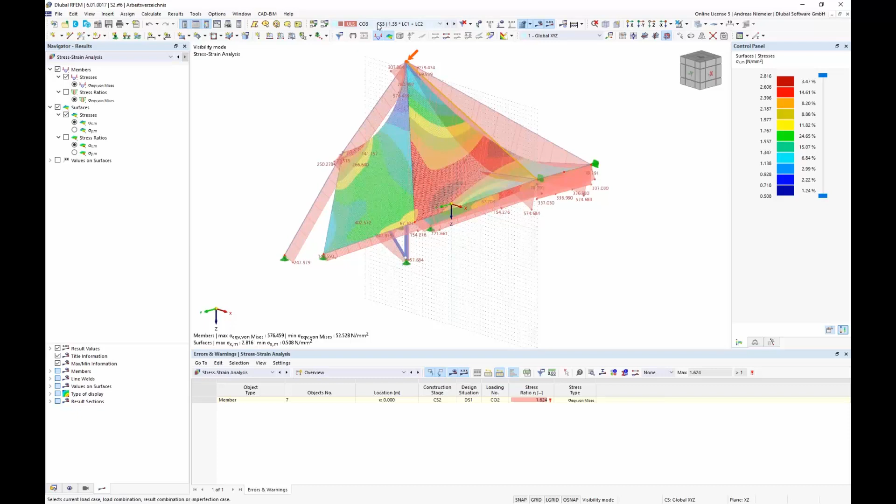Of course, now the nice shape of the form found shape disappears because this is valid for all load combinations from different stages. So the program draws the shape on the original shape.

But this is one point. Now you see we get results for members and for surfaces. So let's deactivate it first for surfaces, deactivate stress ratios, hide the mesh, make maybe a wireframe model, and you see okay, almost all cables fit, the rest we have to rework. So here we have some red ones, so you need a bigger cross section.

So this could be visualized, and you get also a result table on it, stresses on member by stages, by design situation, or by section, where you get the table. This one is maybe the limit state for the different cross section, for example.

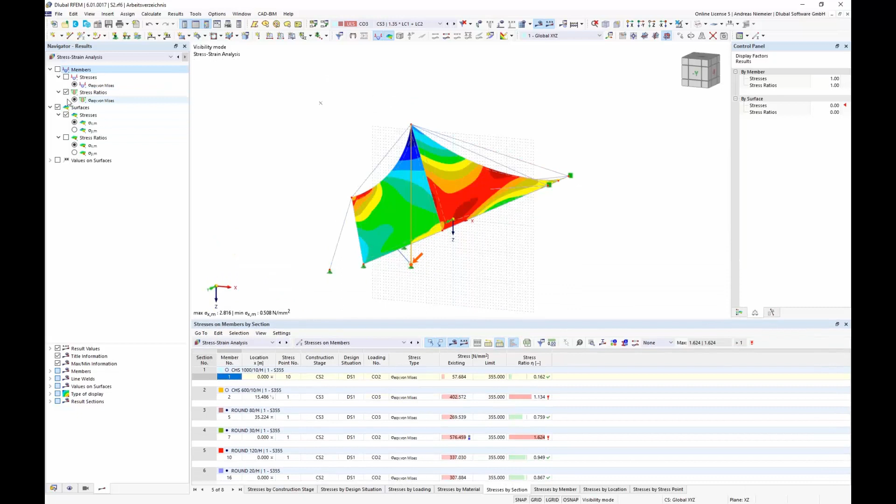The same for, let's say, surfaces. Here we have also utilization, and you see maybe stresses on surfaces. So far the grid points are fine. Stresses by material, by thickness, by surface. You get always a table where the existing value is compared with the limit and get a check or not.

So far. Now you see this is the way of design, and if you have to bring all this calculation on paper, we offer now a program for a printed report.

This printed report could be opened here, and of course at first you have to give a scope of what should be everything inside. Take a look, you get maybe all options, maybe basic objects, node, materials. All these topics could be brought in shape of a table, even stress analysis, what we activated.

And here you can say, error warnings are not interesting for surfaces. I want to document maybe table surface by surface number, and save and show me these tables.

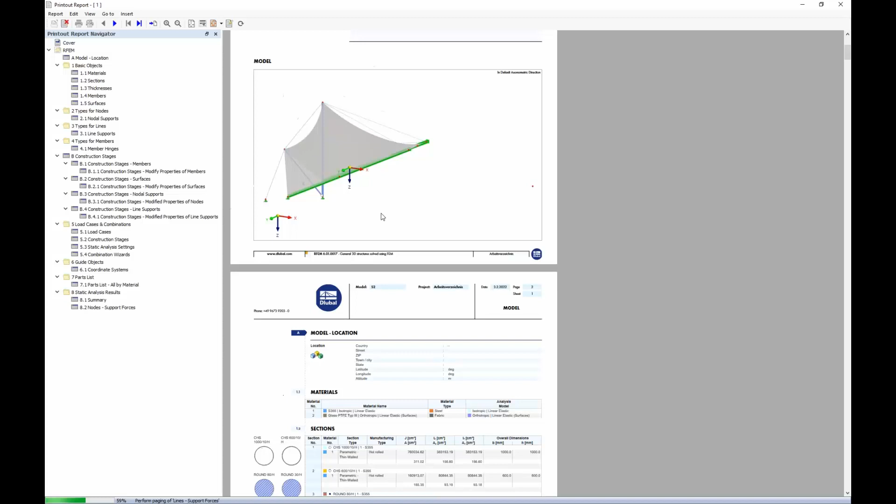Now the program creates a report where we maybe get a sum up of all input data according to the scope we just defined. It's a styled document where you see a cover, a content list, and also all data like sections, members are visualized with nice small pictures, explaining pictures so that the reader of the document understands what is going on.

You can zoom it if it's needed. And of course, the results what we just looked on are defined. So here's our list for cross sections for surfaces. So even this list, what we see in the main program, could be visualized in this document.

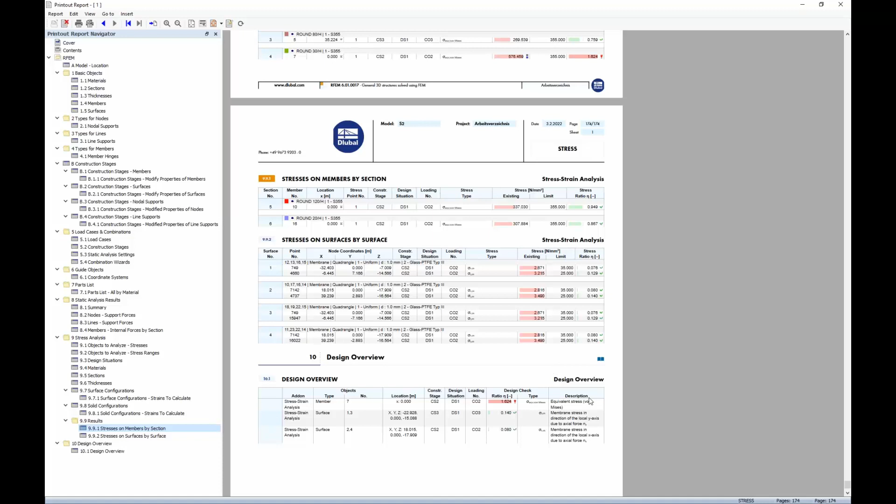And if you are forced to make it more reader friendly, you can add also some pictures. So jump back. The program menu is parallel opened, and you can say please print me a picture of the member utilizations into the document, print that report, and say here please make me a window filling picture with a height of 50% of page height, and yeah, okay.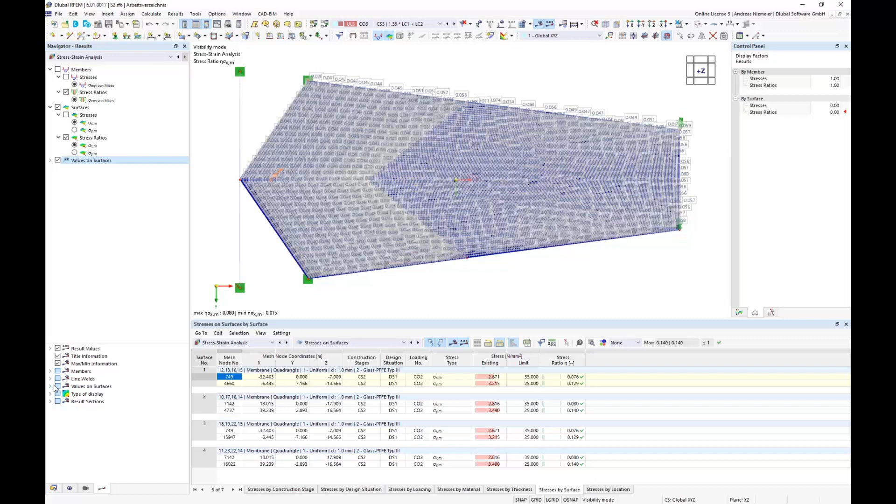Let's make a utilization picture of the surface utilization from top view with values on surfaces, maybe with extreme values. Everything is possible. You can create your own pictures as expected, then print and move it into reports. The same for the Y direction - print it, and if it fits, we update the report.

Now the program is updated. You see the pictures are inserted in time, and the process is still running, so we can work with this document. When it's updated, it's regenerated and you have all these pictures inside. So this is not a big deal, bringing in some result pictures.

What is not nice here is if the color scale is inside the picture - that's not so good. So you can go to properties and say please print color scale outside graphics, and the program updates the pictures so the scale is outside.

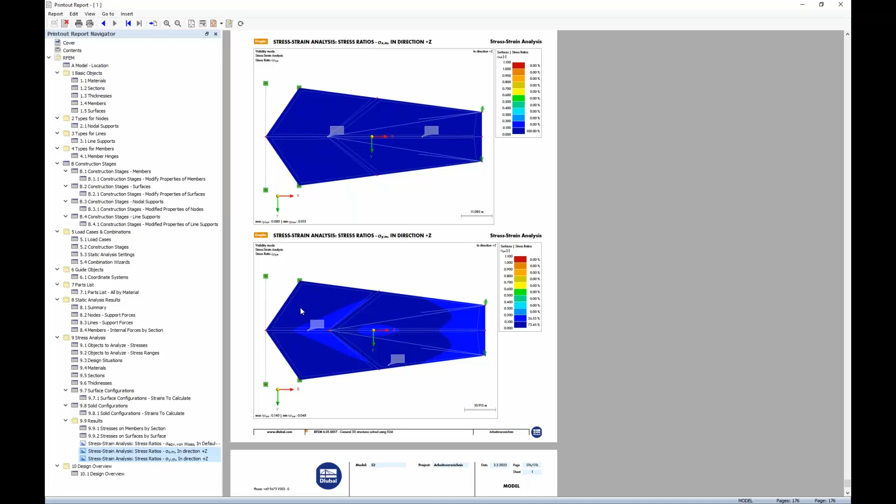To round it up, finally you could be forced to make some description of your structure, and if you have some prepared PDFs or whatever, you can read it in. Go to insert PDF, go to my folder for the webinar - I have a PDF of the website from Antonio Farrer about this stadium in Riyadh. We can bring it in with one click.

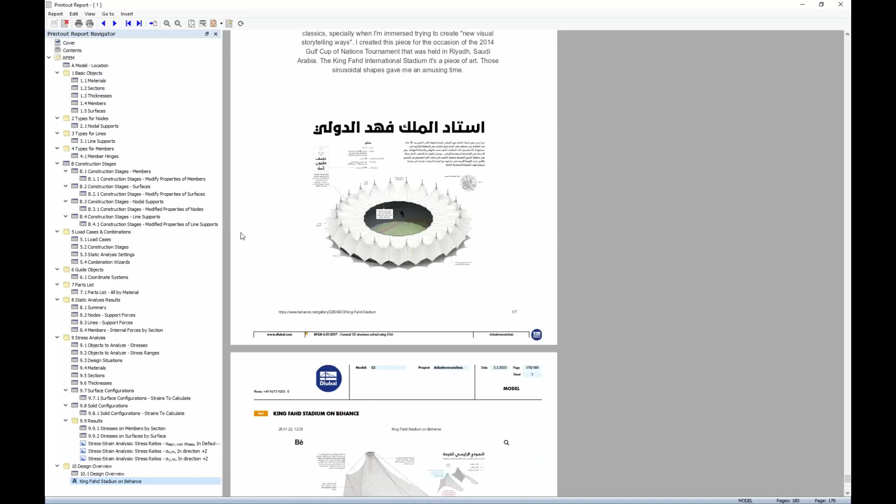Now it's imported. It's not a bottleneck regarding performance, so you can still work with this report, jump to different positions, and create a final documentation for your clients. So this was one workflow for how to work with the program to create shapes based on other shapes.

Now maybe we can think about how to finalize all this analysis. For this, a look into the load list is important, because we only did basic checks on this small 15-degree segment, but to do a full analysis you also have to consider wind loads.

Wind loads for this type of structure are not so easy, because we have no concept of how the load distribution looks. A question comes up: how big are the loads from wind? You can solve it with a real wind tunnel test, or what we can offer - you can place your structure in a numerical wind tunnel.

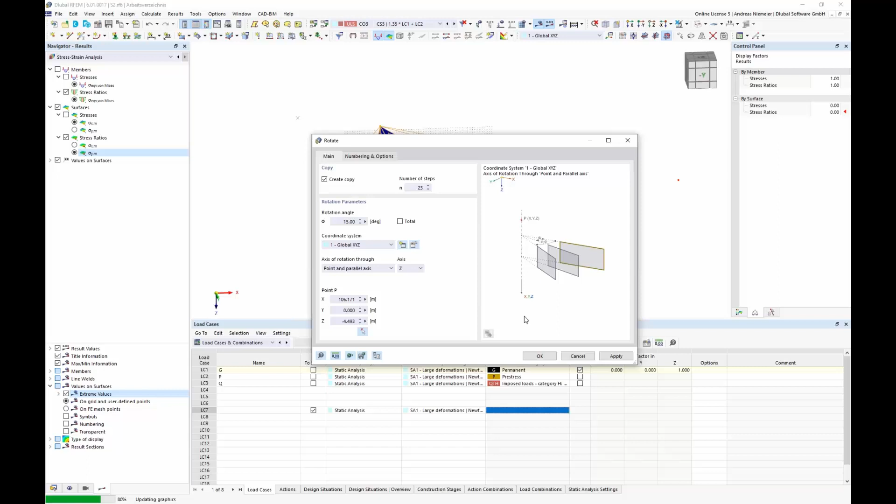For this, you need a full model, not only a 15-degree segment. You can say please take this structure and rotate it by 15 degrees around the center with 23 steps, and confirm this setting. You'll see it's not a big deal to create such a big stadium model, because if your structure system is modeled clearly, it's no big deal to combine it into a bigger model - even the stages topic is not so critical.

Now if you have such a model, you can place it completely in a numerical wind tunnel. Because this takes some calculation time, I prepared a model for you. Let me jump into another RFEM instance. This is almost the same structure, even with these stages we just discussed. The main difference is that I created here a wind load case, which in analysis type has a different flag.

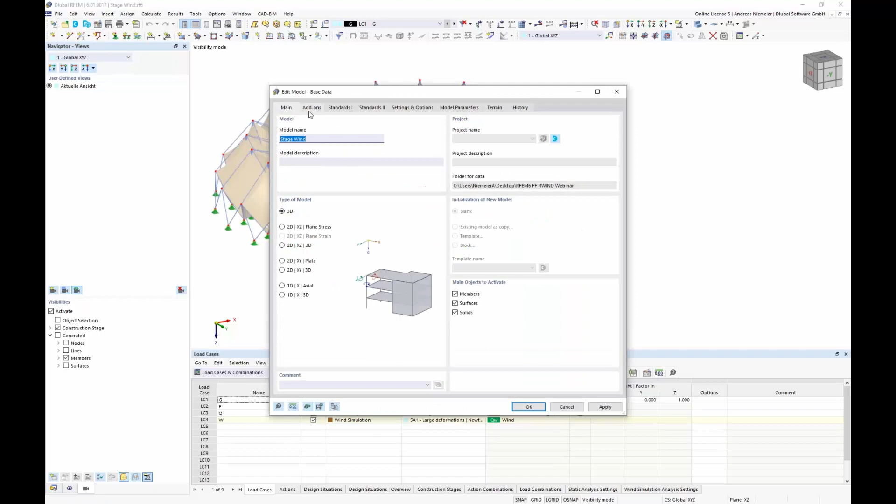This different flag appears because in add-ons the wind simulation is also activated. If you activate the wind simulation, you get the option to define in analysis type 'wind simulation.' This opens two new registers, where you can say please use this model with this stage and this shape for a wind simulation in a numerical wind tunnel, where the wind medium is defined according to density, kinematic viscosity, turbulence model and meshing, with a wind profile that can be user-defined in a table or according to standards.

The wind comes from this angular direction. Here you specify the medium around the model, the input wind speed, and the size of the wind tunnel with the input wind speed.

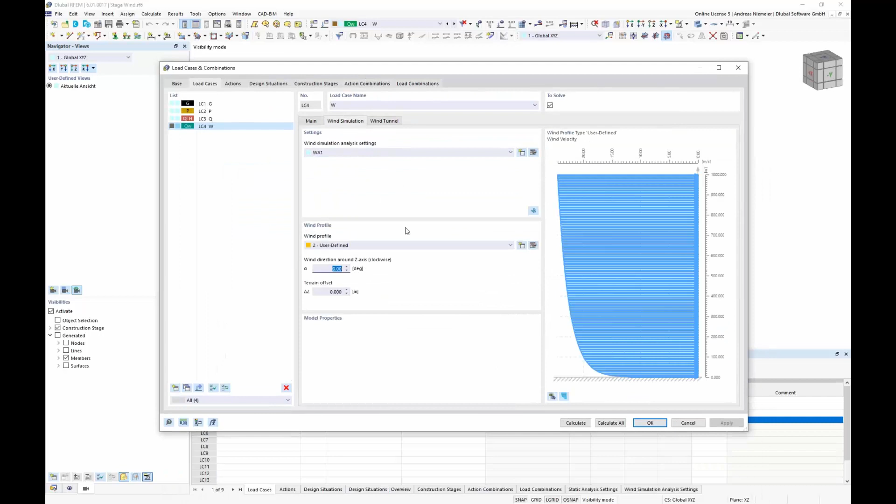If you calculate this load case, it's a two-step process: the program moves the model in the background into a numerical wind tunnel according to all defined settings, calculating the wind medium around the model. Let's take a look - this is the numerical wind tunnel structure with an input window, and now the process is detecting the pressure around the structure.

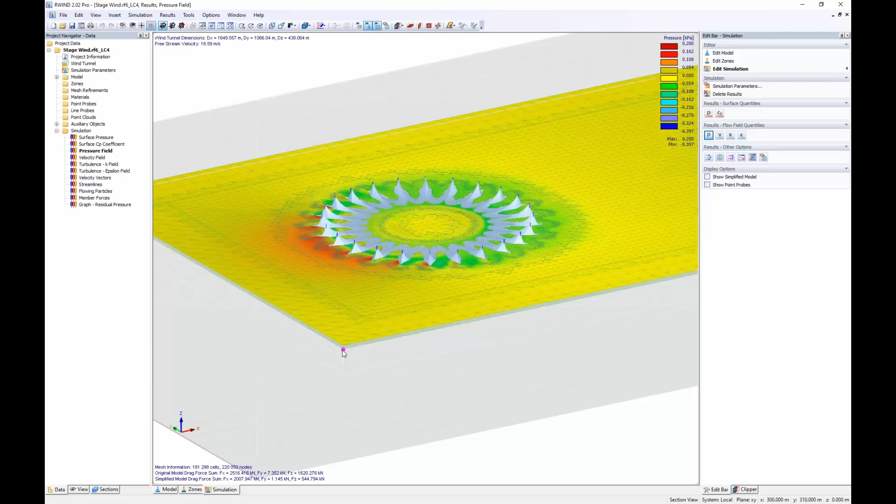Now this is only maybe a slice of it, but you can see how the pressure is changing. You can also say, please show me results in this slice. It calculates the wind velocity around the structure and even the wind's direction.

So with this information, the wind flow for the structure could be detected, and according to this information, the program can calculate the pressure on the structure. You see, if it's updated, we have here in front some pressure, here some suction or below.

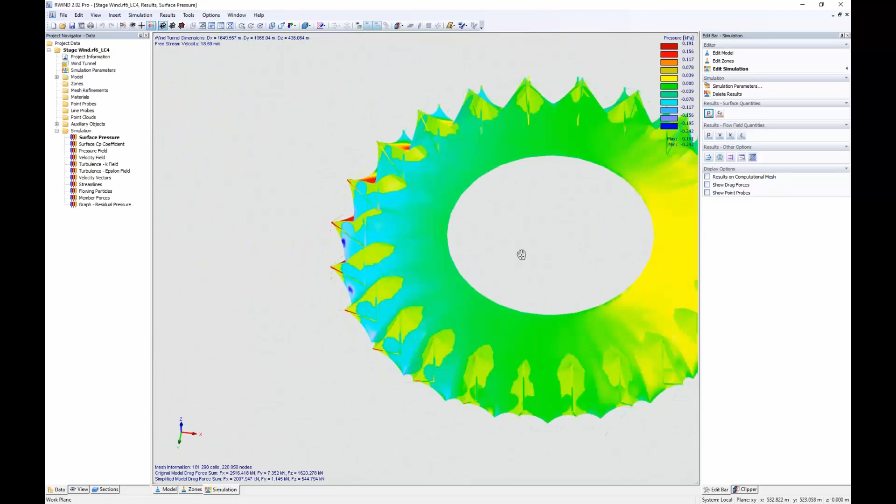How to see even in the back suction. So all this influence is given then, and these forces, these pressures are given back to RFEM, to this load case with wind analysis, and could be used for a subsequent static analysis.

And this is a two-step calculation what I just mentioned, and leads to the situation that it's running, and can detect for these forces, new internal forces in this structure.

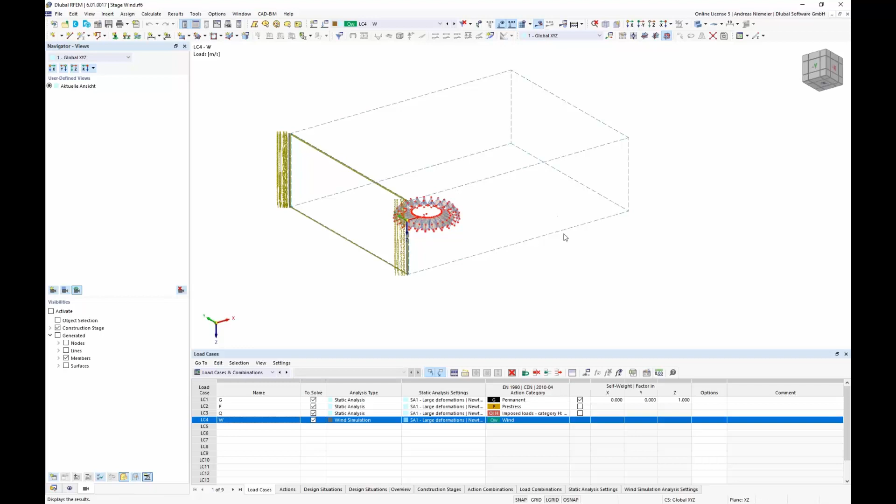Now it's ready, and you see, if I activate the loads, this is maybe the wind tunnel. If we show everything, you see this is the input wind speed like we just saw for 0 degree in X. And now if I activate forces, you see this is now the structure's answer to the wind simulation with the loads that the wind simulation calculated on the structure.

Here we have, for example, the internal forces, normal axial forces. Maybe only I rotated so we have now, yeah, exactly. And even we get deflections on the structure.

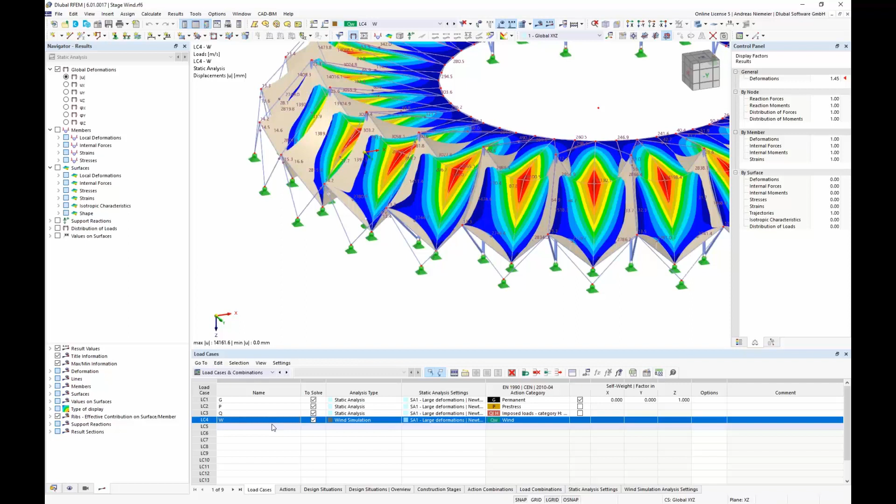All this feedback of the structure is given according to these loads, and with this information and this real load distribution of wind load, you can go ahead like I showed you before. You can start combination of these loads, calculate loads for your ultimate limit state and serviceability state, and feed it into design add-ons, for example RF-STRESS or steel design, as required by the rules of the buildings. And this brings me to the end of my webinar, and I give back to Andreas.